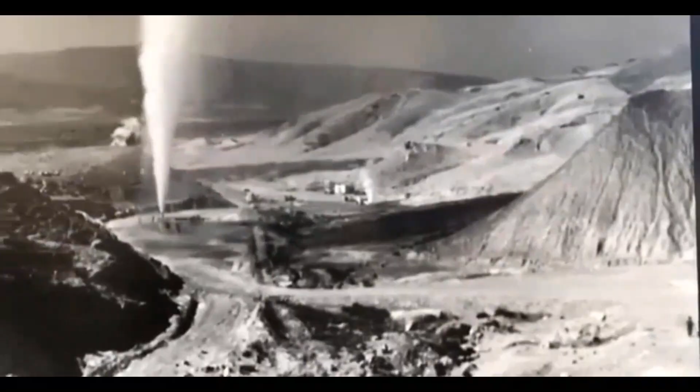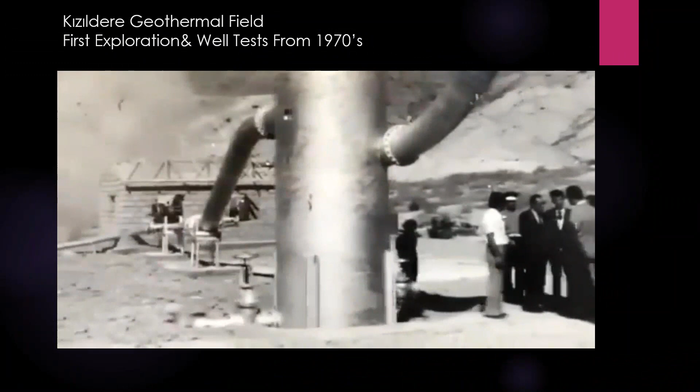Yes, it's a small part of a documentary, special thanks to the state-owned Turkish Mineral Research and Exploration Company officials. You can see here the first exploration site. That's part of the video, and we can continue with the early stage of the Kizildere geothermal field.

The Kizildere geothermal field is a geothermal power plant located in the Kizildere village of Sarayköy district in Denizli province, in southwestern Turkey. The Kizildere field is in the middle of ancient cities such as Hierapolis, Laodicea, and Aphrodisias. The usage of Kizildere geothermal natural springs goes back to the 2nd century BC. Today, it can be seen in Pamukkale and Hierapolis through natural geothermal pools, bathrooms, and flow channels.

The first geological and geophysical survey in the Kizildere geothermal field began in 1965, carried out by the state-owned Turkish Mineral Research and Exploration Company. The first geothermal reservoir was discovered in 1968 with a geothermal well drilled to 540-meter depth, with a bottom hole temperature of nearly 200 Celsius degrees. From 1968 to 1973, a total of 16 geothermal wells were drilled to depths ranging between 370 meters and 1,200 meters.

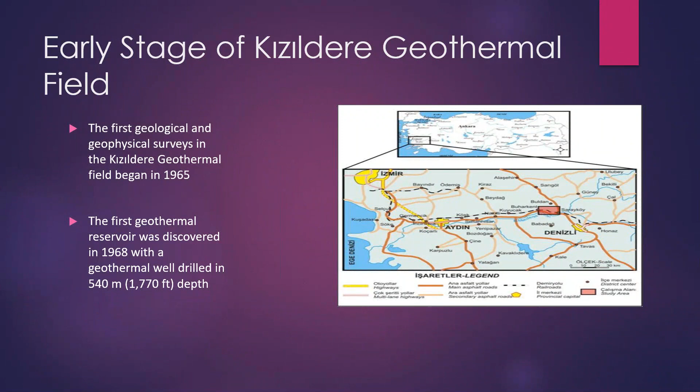I want to give some global installed geothermal capacities; you can see the total capacity on the slide. Also, Turkey's capacity has recently reached 1.7 gigawatts, constructed only in Turkey. This makes it 4th in the world and 1st among European countries.

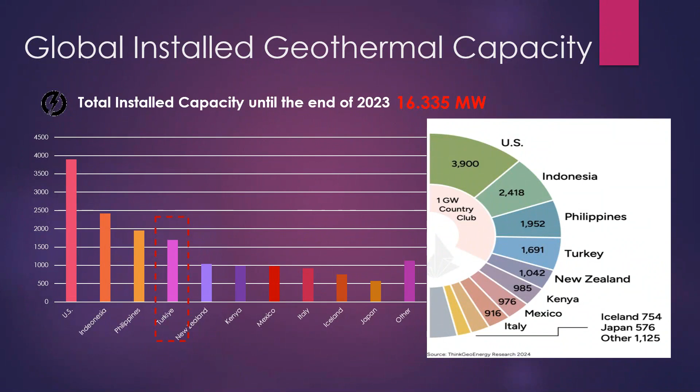On the other side, there are 5 geothermal investors in Turkey: Zorlu Enerji, Mogan (also known by another name), Gürmat Enerji, Çelikler, Maren, and Greeneco. These are all located in the southwestern part of Turkey.

Let me give some brief information about the project and timeline for the Zorlu projects. In September 2008, Zorlu Enerji, a subsidiary of the Zorlu company, acquired the Kizildere geothermal facility from the Ankara electricity production company, a state-owned company, through a privatization process along with 7 other hydroelectric power plants across the country. Zorlu Enerji obtained the operating lease right for a runtime of 30 years.

With the initiative of the Governmental Electric Power Sources Survey and Development Administration, a research project was started by Zorlu Petrogas Oil and Gas Group. After 1 year, the Petrogas oil assets were sold to another petroleum company, and then the project was carried out by Zorlu Geothermal Company. It is now newly in cooperation with Hacettepe University and the Middle East Technical University to increase electricity production from the Kizildere geothermal field.

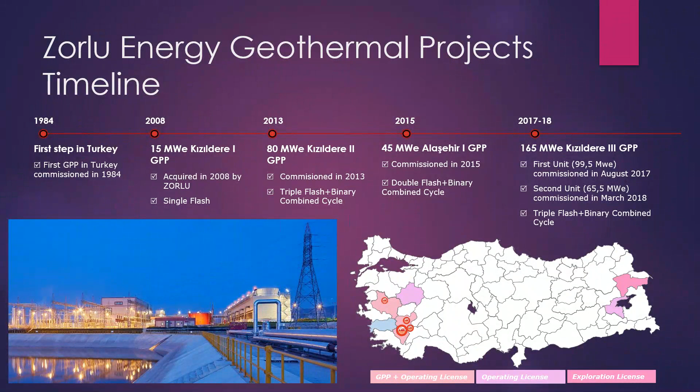The power plants, Kizildere 2 and Kizildere 3 Unit 1 and Unit 2, use a triple flash combined with binary cycles, and you can see the capacities are 80 megawatts and 165 megawatts.

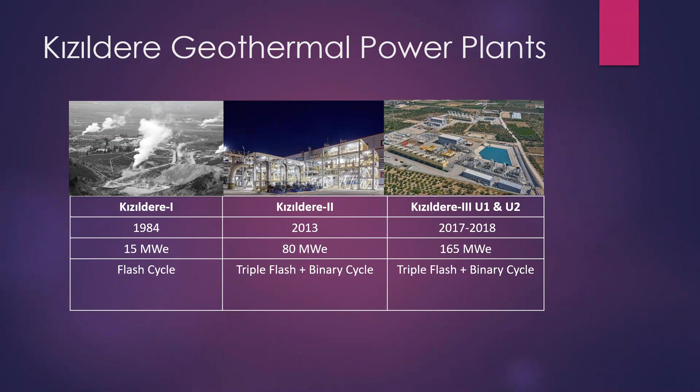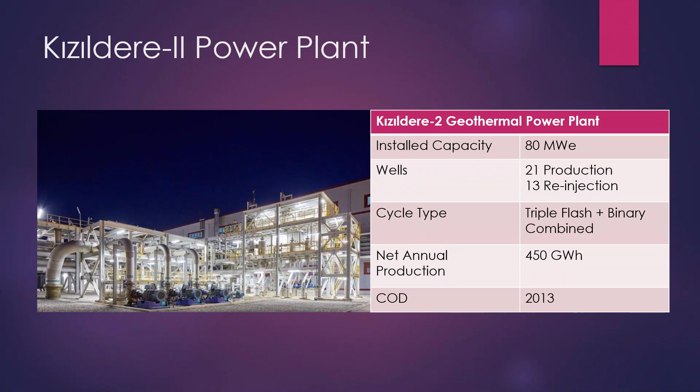On the other side, some detailed information: there are nearly 21 production wells and other reinjection wells drilled for the Kizildere 2 power plant, and the net annual production capacity is 450 gigawatt hours. For Kizildere 3, it is the biggest capacity geothermal power plant in Turkey and one of the biggest in the European countries.

Also, there are production wells and reinjection wells. The cycle type is triple flash and binary combined system, and the net annual capacity is 1000 gigawatt hours.

It is a new technology, using triple flash as well. Why was it chosen generally? I think it is a very efficient, more efficient power plant type compared to other types.

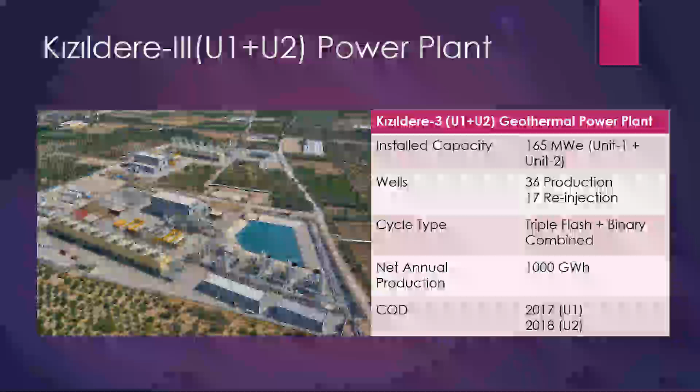This is the general situation and future of the geothermal projects. We also have expertise in EPC construction, procurement, business development, drilling and exploration. Out of the 1.7 gigawatt installed capacity in Turkey, Zorlu, with 4 plants including Alaşehir, has a total of 305 megawatt capacity, making it the biggest capacity holder in Turkey.

There are also some projects under development. There are 2 projects, Arikan and Arikan 2, related to the Alaşehir expansion. Also the Tekkehamam and Kizildere expansions, totaling 85 megawatts in the expansion of the Kizildere project.

And there are some other licenses. For example, I can mention an area in the east of Turkey. We continue new exploration for new licenses around Turkey.

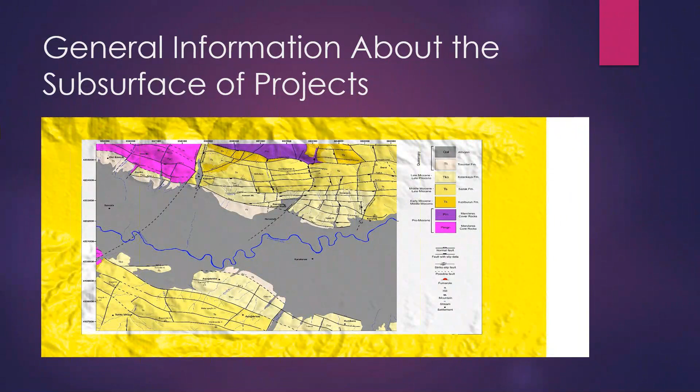Before the drilling projects, I want to show a small conceptual model video for you. Also, before the video, you can see some general lithology and formation of the field, and a general map of the field from a technical perspective.

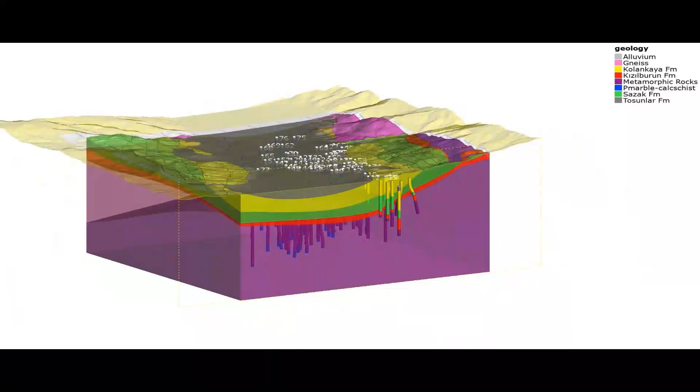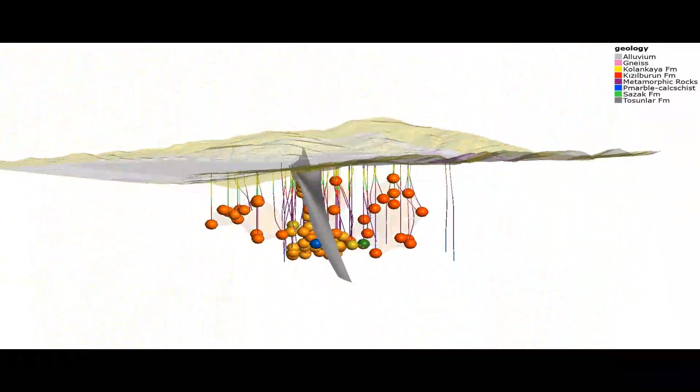Also, this shows the wells, the general formation and lithology. The last scene is related to the geochemical modeling, and also shows the conceptual model, along with the main faults and the general formation of the field.

For the drilling and workover projects, I can give some highlights. The drilling project starts in 2009 and finishes in 2022 with the last makeup wells. This is only for the Kizildere 2 and Kizildere 3 geothermal power plants. For the expansion wells, nearly 30 extra wells will be drilled for the Turkiye and Kizildere 4 projects. Now we have approximately 90 shallow and deep wells.

In total there are 67 production and 23 reinjection wells. The shallowest well in our drilling projects goes to nearly 500 meters, and the deepest well goes to nearly 4,350 meters.

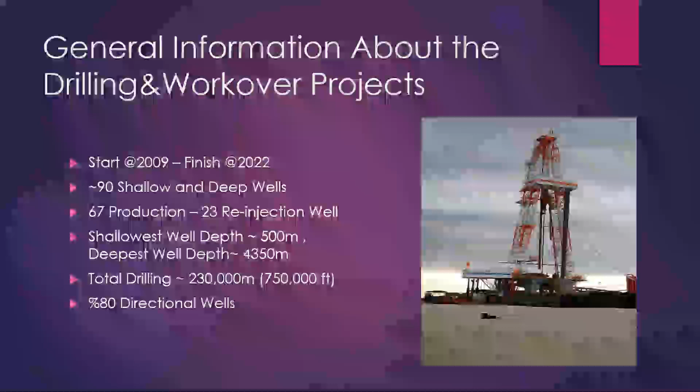In nearly 15 years, the total drilling activity in Kizildere out of Alaşehir is 230 kilometers. And 80% of the wells drilled were directional well type.

For the next slide, these are the big drilling projects. There were many troubleshoots, problems and other things, but the most important one is the higher bottom hole and circulation temperature. It goes up to, for example, 175 Celsius degree. And the low ROP of the formation, also the aggressive and abrasive formation we have in the metamorphics, causing mechanical and differential stuck pipe because of the faults and other differential pressures.

Some directional drilling problems and unwanted lost circulation zones occurred. The project time is limited for the drilling because we have to finish drilling, then test and other things, so we can construct and reach the capacity of the power plants. There was also a lack of drilling services at the start of the project.

In this case, maybe we can talk about solving these problems. Normally the project started with deviated wells, but after some time it was not economical because of oil prices and the directional services cost too much. We continued the drilling project for the first 20 wells using a normal BHA out of directional drilling BHA, and the ROP dropped too much, and drilling times for example for 2050 meters to 3000 meters went to 90 or 100 days like this.

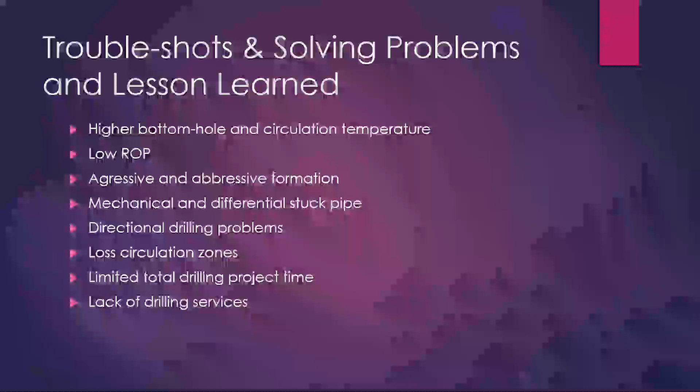On the other side, we also focused on the low ROP. I think we solved this problem using higher developed bits, the PDC bits, normally from the start of the project. Anybody else could not use this, but we used the highly developed ones.

For example, it went to shoe at nearly 1,200 meters for one well, and for the second well extra meters, totaling 2,500 meters. The section we drilled with the PDC had a general ROP of 10 or 11 meters per hour. It was very, very beneficial for us.

The field became an R&D center. We analyzed everything, all the parameters and results, and directly changed to develop for every well, decreasing the cost and reducing the drilling times. We made a successful job about this.

The other mechanical and differential stuck pipe problem was solved by the mud, and we also had direction drilling problems. It was a very hard formation in Kizildere, especially in the metamorphics on the production side.

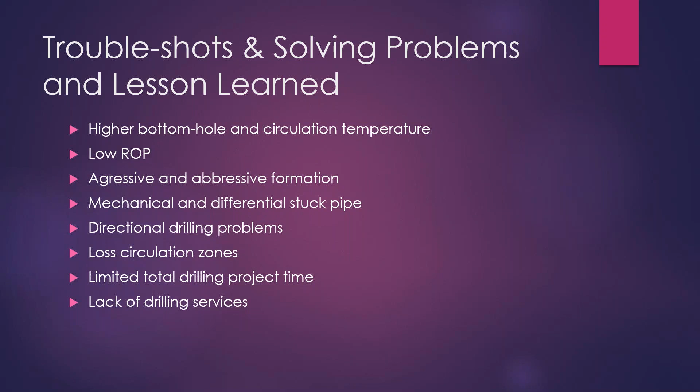After a detailed process about drilling, for example, in Turkey's first geothermal coil tubing operation for well completion, we used it. Normally in the standard case, all well completion operations were made by the rig, but for trip time and other limitations, we had to use new techniques for the well completion side.

We went to service companies, the international service companies, and told them we are running with coil tubing. Their first answer was that their BHA and equipment were not resistant to 200 Celsius degree or more. But in a few months, they developed highly resistant coil tubing.

We made all the well cleanings, the acidizing, and other things in a very short time. In like 3 days, we completed all the well completion jobs. Also, the first directional drilling geothermal well, a deviated well, was drilled in Turkey firstly in the Zorlu project.

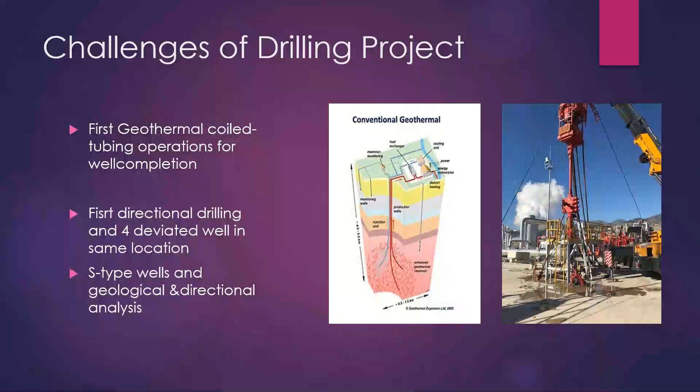At the end of the drilling project site, I want to give some related funded European projects and partnerships.

The most related funded drilling project is the Deep Light project, funded by GEOTHERMICA. There are some other projects, for example the GECO project for CO2 injection and decreasing CO2 emissions, and also the Succeed projects, GeoPro and GeoSmart, all related with subsurface works.

What's the Deep Light project? It is a revolutionary drilling technology developed to use electric power instead of mechanical and hydraulic forces. With this electro pulse power, we trust in this - we make efficient drilling, more powerful drilling, and reduce drilling times. We aim to change all the mechanical drilling.

We are at the end of the project. We've taken good results from these projects, and we continue to develop the Deep Light project and use it in the Kizildere field. We aim that maybe a year later we can drill with the electropulse system in our field.

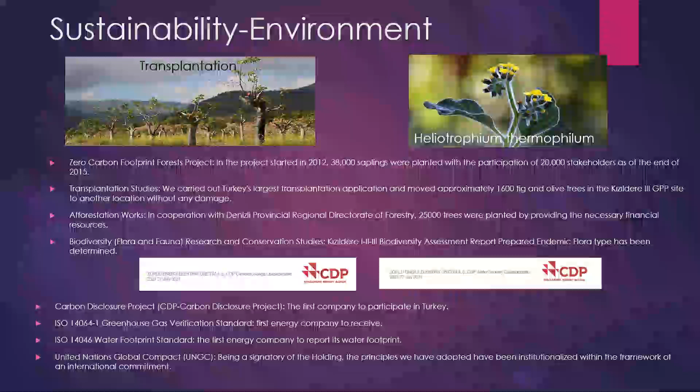I want to talk about the sustainability and environmental impact of the project. Directly supervising all the operations on the field, I can say this from the start of the project to the end of the project.

There were no hazardous or dangerous things for the environment and socially, I can say this all the time. We make all the operations with great attention about the environment. It is the policy of our company, and also personally our policy. We have some zero carbon footprint forest projects.

The most important, crucial thing for me - for example, there are many fig and olive trees in the Kizildere 3 GPP site, 1,600 trees. Normally we have rights to take all the trees, but the company started the largest transplantation application. We took 1,600 trees and replaced them to another side of the field. Now 90% of these trees are alive and they produce fig and olive now. It was very important and it was lovely for me.

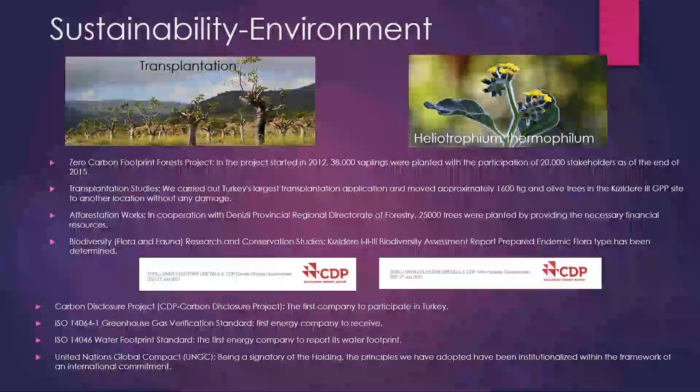On the other side, we have some biodiversity research and conservation. For example, you can see the heliotropium like this - it is endemic flora, and our environment department found this plant, and now it is in a conservation site. In the biodiversity site, we pay great attention to the flora of the field, and we have other carbon disclosure projects we have participated in, in Turkey and internationally.

Also, we have many social projects during the Kizildere field - social projects about education for the school, and many trips to our site. All the time we have many students, intern students, in our project to support the education side.

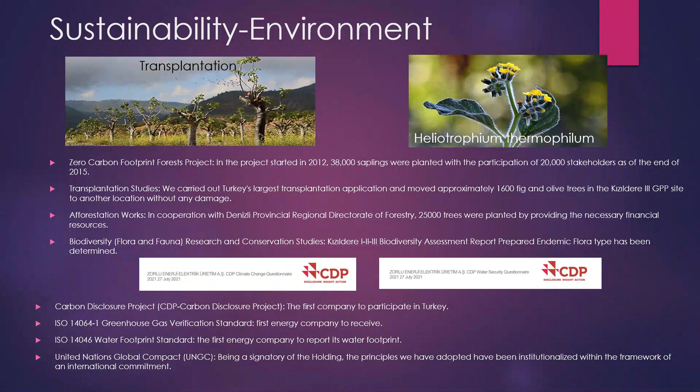As the last slide of my presentation, for today's situation of the geothermal field, I want to give a video also.

We have two infinite energy resources. One of them is right under our noses, the sun, and the other one is under the ground we walk on, geothermal.

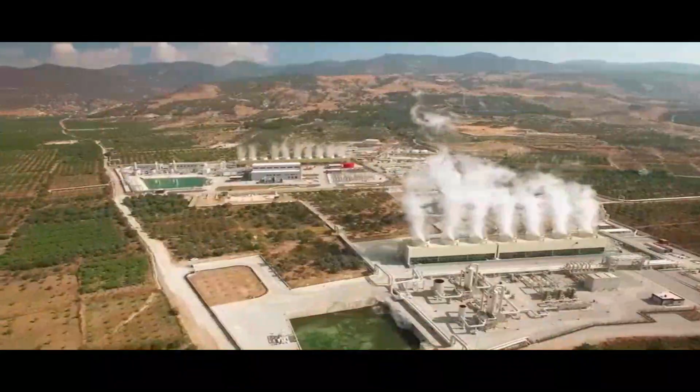Geothermal. Maybe it's an unfamiliar word to you, but it has a very simple meaning. It's thermal water, steam and gas stored deep beneath the earth's crust. Geothermal, the Earth's energy, is a natural resource that requires research, exploration, vision, information and experience, and the leadership of experienced and prudent investors to utilize this hidden resource beneath the Earth.

Zorlu Enerji has been unearthing Turkey's geothermal power since 2008. Turkey's first geothermal plant, 15 megawatts, Kizildere 1. An efficient modern plant, 80 megawatts, Kizildere 2.

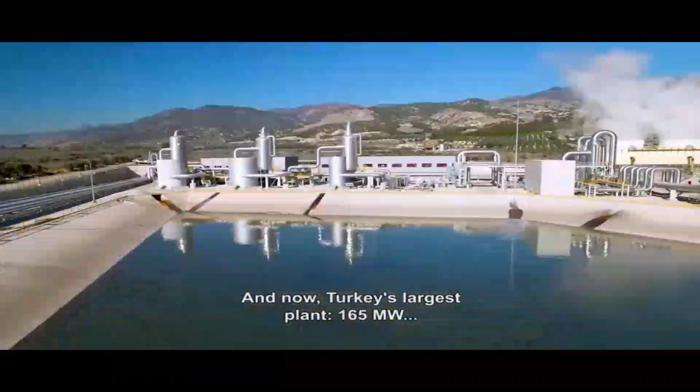A plant that stands out with its high-tech infrastructure, 45 megawatts, Alaşehir 1. And now, Turkey's largest plant, 165 megawatts, Kizildere 3. Today, most of Turkey's geothermal energy production is carried out by Zorlu Enerji alone.

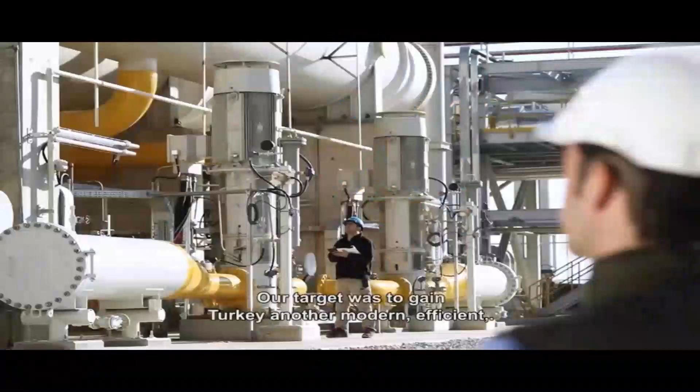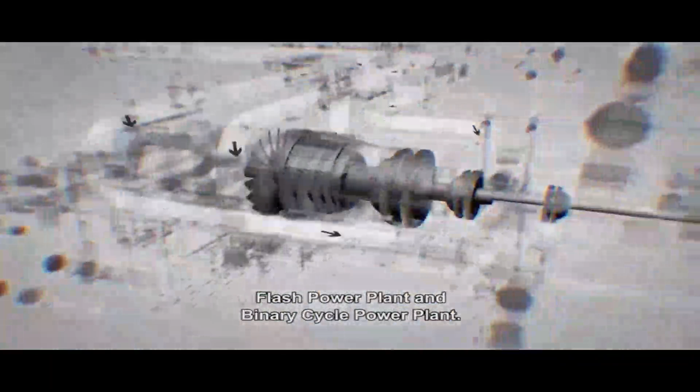Our target was to gain Turkey another modern, efficient, eco-friendly and sustainable geothermal plant. Kizildere 3 has two types of units that work in combination, flash power plant and binary cycle power plant. This system has higher efficiency than classic geothermal plants in the world, and the combined system used in Kizildere 3 minimizes the plant's environmental impact.

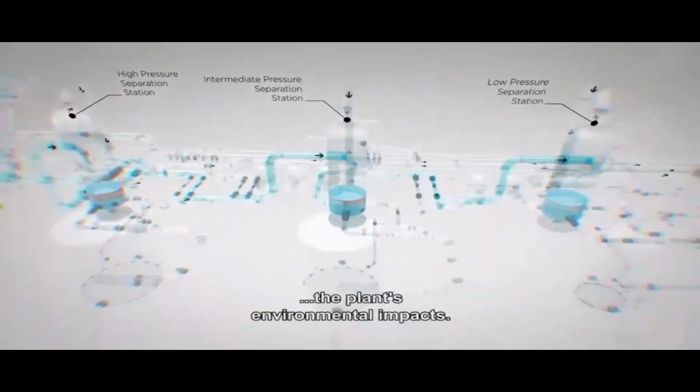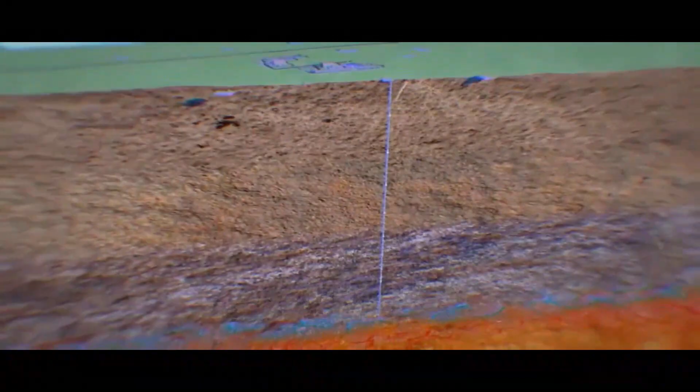As in every geothermal plant built by Zorlu, the geothermal brine gathered from the resource is re-injected back into the reservoir after powering the turbines via steam power. Geothermal, tomorrow's energy, is a completely indigenous and renewable resource. Thus, investing in geothermal to reduce foreign energy dependency means investing in Turkey's future.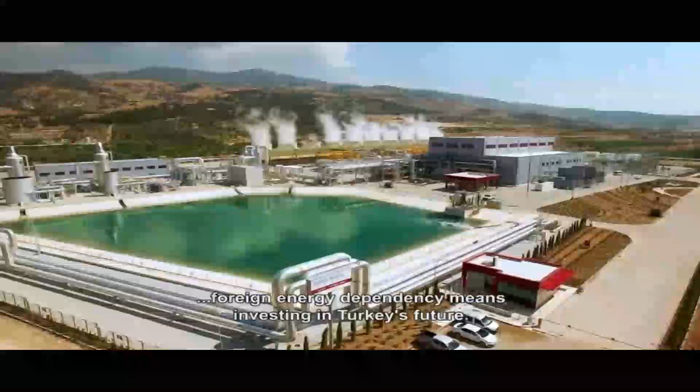Following Kizildere 3, Zorlu Enerji, one of the industry's major investors, is working on implementing many other projects in the area.

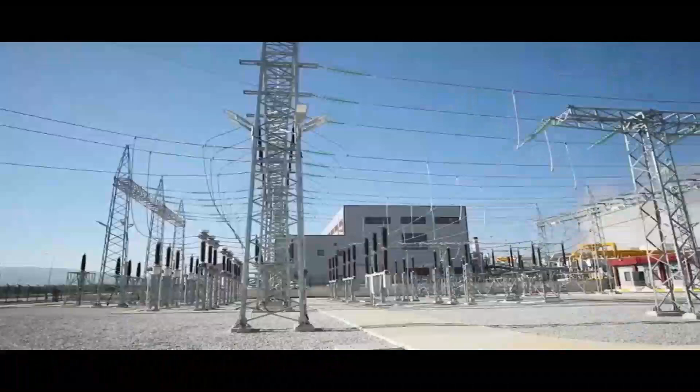Geothermal not only means electricity, but it also provides added value to the immediate surroundings of Zorlu Enerji. Zorlu Enerji gives the children who are the minds of tomorrow the key to the future by implementing different projects, because our energy is for our children.

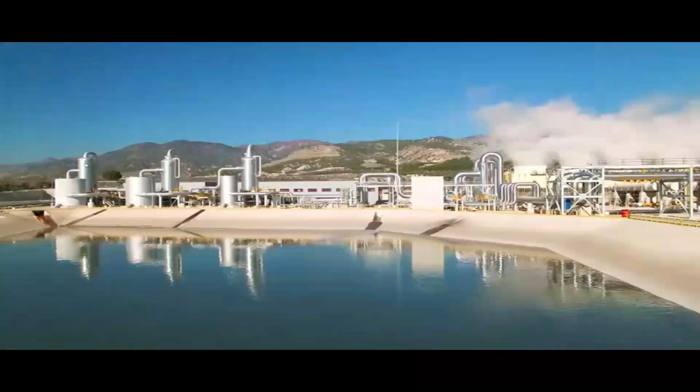Turkey's largest and most efficient geothermal plant, 165 megawatts Kizildere 3, is now operational. And thanks to Kizildere, the hidden power beneath the earth is in our lives now.

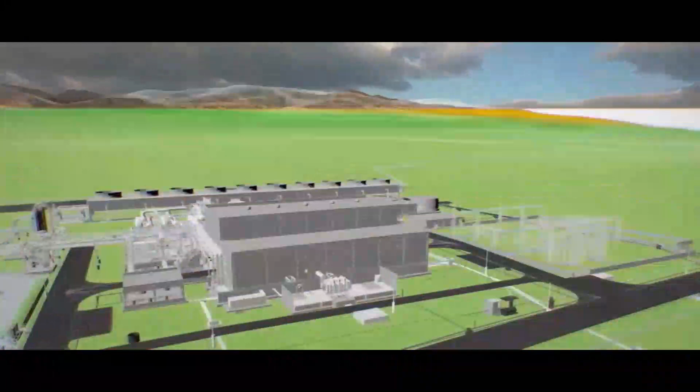Some things are much closer than we think. The right energy is very close indeed. Zorlu Enerji.